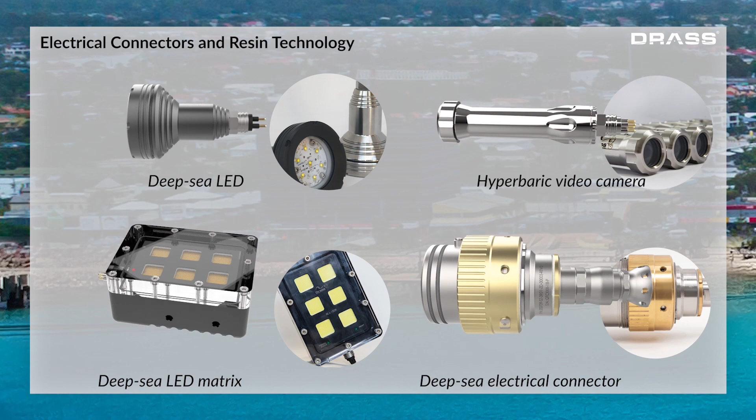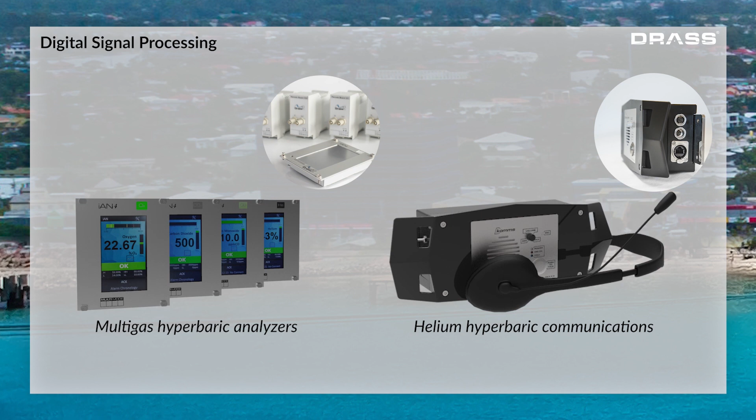We have made breakthroughs in digital signal processing. We are the only ones to have developed multi-gas hyperbaric analyzers, meaning that once connected to any gas cell, they automatically become complex analyzers of that gas. This occupies less space and reduces the need for spare parts on board.

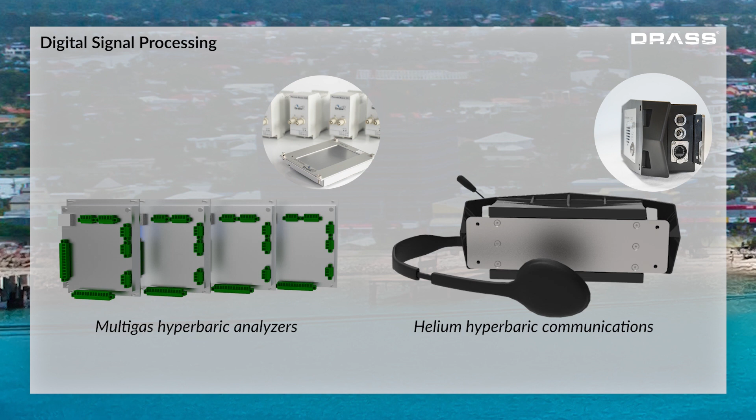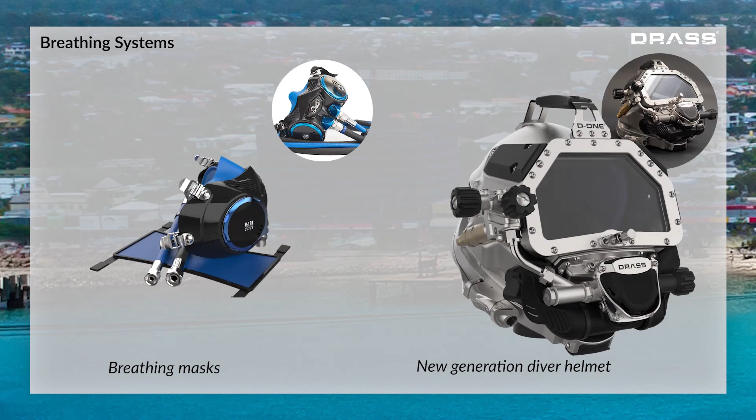Let's move on to the breathing apparatus for extreme depths. Our new diving helmet, the D-ONE, was unveiled to the oil and gas sector at Offshore Europe 2019 in Aberdeen. The D-ONE is a formidable innovation by current market standards because a single helmet supports 3 dive modes. Until now, 3 different helmets have been needed.

Producing a breathing mask or helmet is no small achievement. Heavy investment is needed in testing and simulation equipment built to specification. DRASS has the most advanced laboratory for breathing devices at depth, and all of this created without government funding.

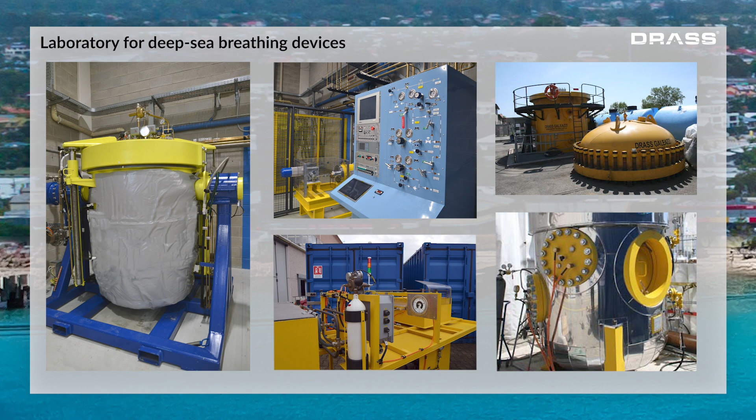Let's go back to the sea for a moment, because the development of DRASS components is aimed to support the integration of complex projects.

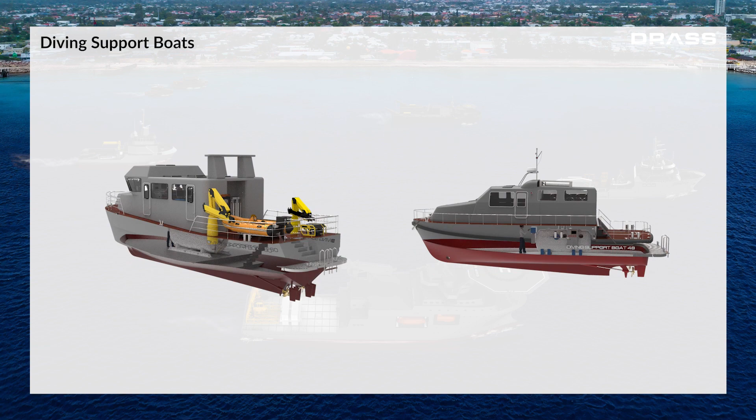We have designed diving boats with more compact dimensions and enhanced performance. This is thanks to the hyperbaric chamber installed on the keel that ensures better stability. We have also developed 2 rapid response submersible support and rescue vessels.

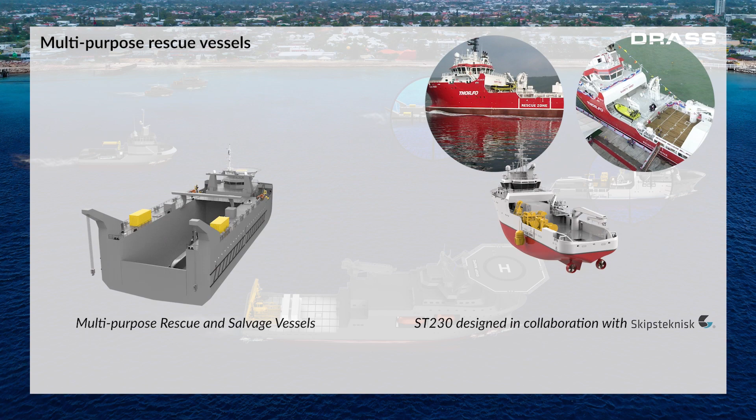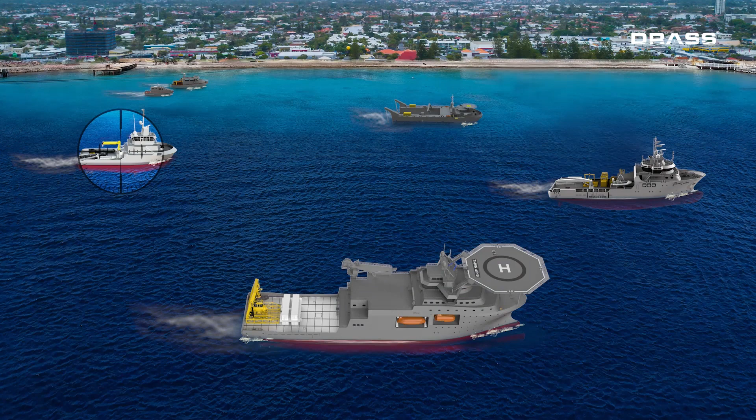But our greatest achievement to date is converting an offshore ship into the most modern submarine rescue vessel. What you see is the result of a consolidated experience in the offshore industry. DRASS has completed more diving vessels than all our global competitors combined in the last 15 years.

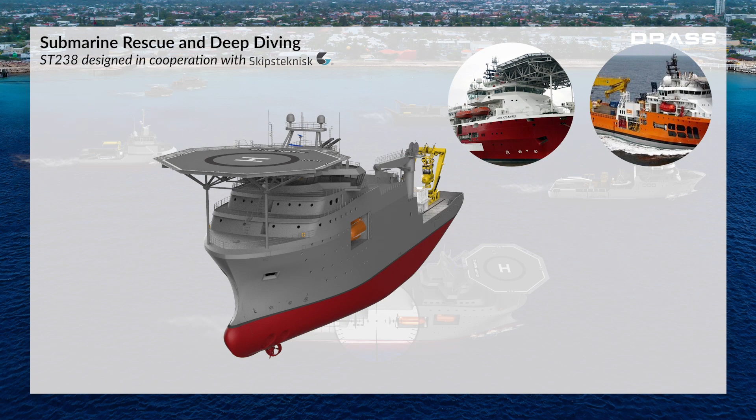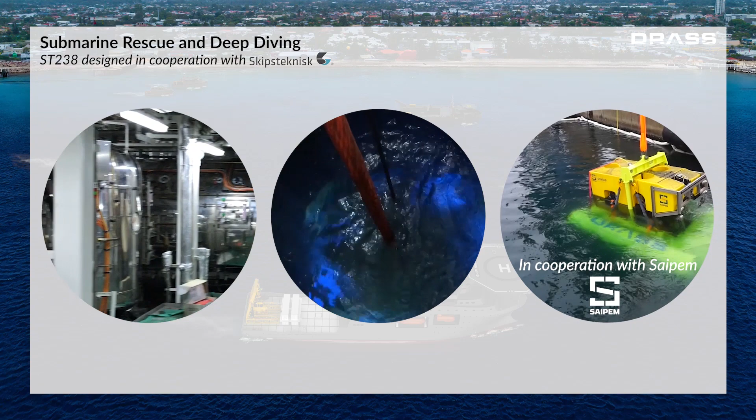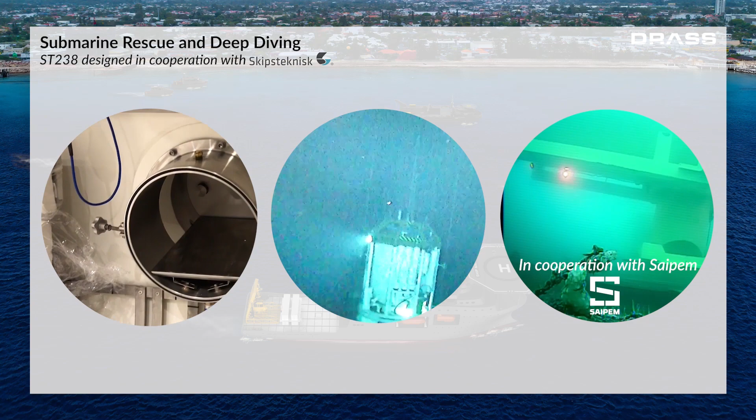This ship embeds complex and specialized systems. DRASS 100 series hyperbaric decompression chambers with automatic control represent a worldwide standard for offshore diving. The ship is equipped with a diving bell for deep dives from 300 meters deep and beyond. The remotely controlled submersible rescue vehicle, designed in cooperation with Saipem, will play a key role later in this presentation.

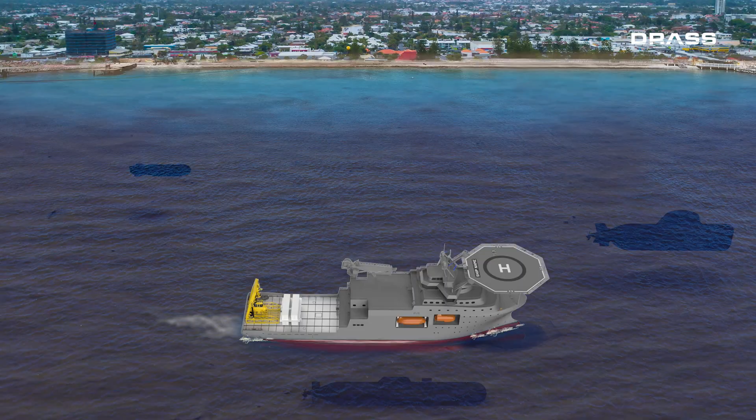Now let's get ready to dive in and explore the vehicles for the Special Forces. We will also take a closer look at the range of compact submarines, ranging from 85 to 450 tons, along with their associated weapon system by Leonardo.

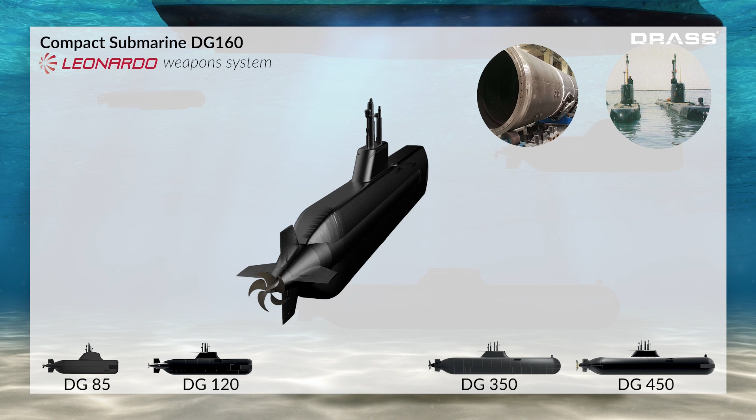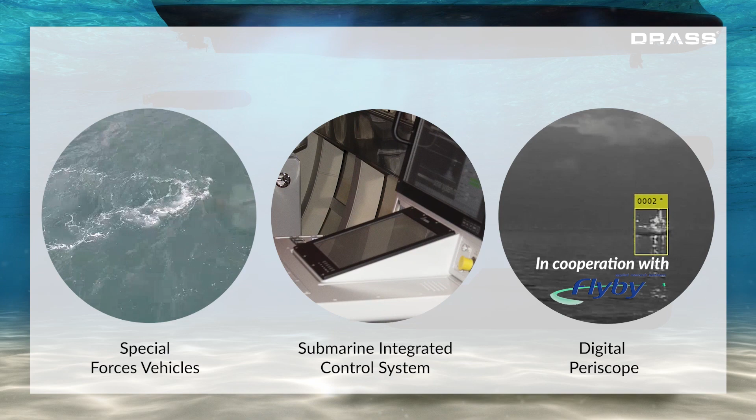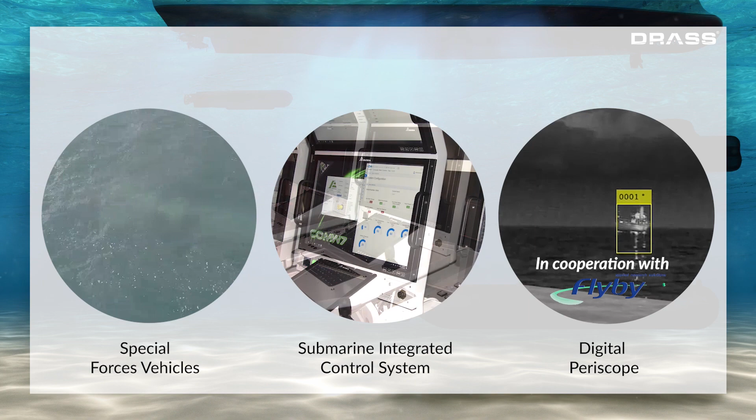Here is a world that contains a microcosm of technology. Without itemizing the vehicles for Special Forces, let's focus on the Submarine Integrated Control System. A further development is the digital periscope that synthesizes infrared and optical data in cooperation with Flyby.

Now let's focus on what happens under a submersible rescue ship, where different systems contribute to the mission. We can operate the Rapid Intervention Rescue Capsule, or release the divers with the diving bell we mentioned earlier. We can connect the ventilation system to supply fresh air to the sub.

And finally, we can deploy the remote-guided submersible rescue vehicle seen above, which represents a steep technological evolution compared to current piloted vehicles. Aside from the graphic simplifications, you can see that it's a little crowded down there, and that's going to be the guiding topic from now on.

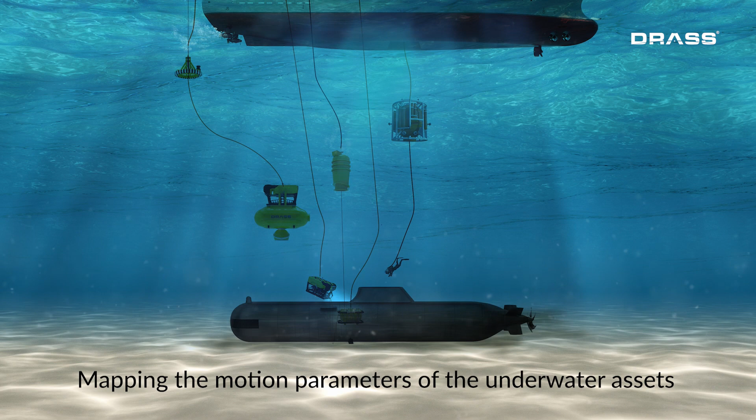In the local domain, the concept we are working on with engineering is an air traffic control solution applied to diving. The goal is to map the location and motion parameters of the underwater assets for coordinated and safe operation of multiple vehicles during a rescue mission.

Now let's broaden the view. It is a common opinion that the future will see an expansion of crafts and traffic, given the strategic value of the sea in terms of food and mineral resources and the importance of maritime routes. Of course, there is also a need to keep all of this safe.

The control of the seas in the future will be as important as the control of the sky has been until now. It will take place through a wide network of dual-use sensors, carriers and payloads, mainly resident on the seabed.

Being in control of the subsea environment means being able to manage this network and interface its components.

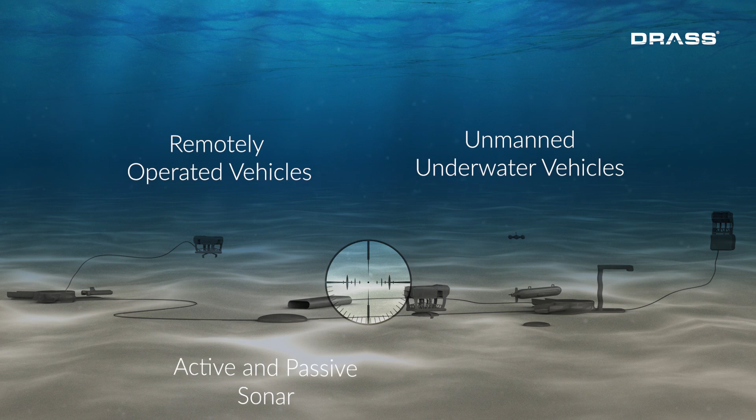As we get even closer, we see individual objects that now exist and are in the process of being developed, as you will see later in this presentation. Here you see ROVs, unmanned underwater vehicles, and sonar and subsea charging stations, technology already existing in our industry.

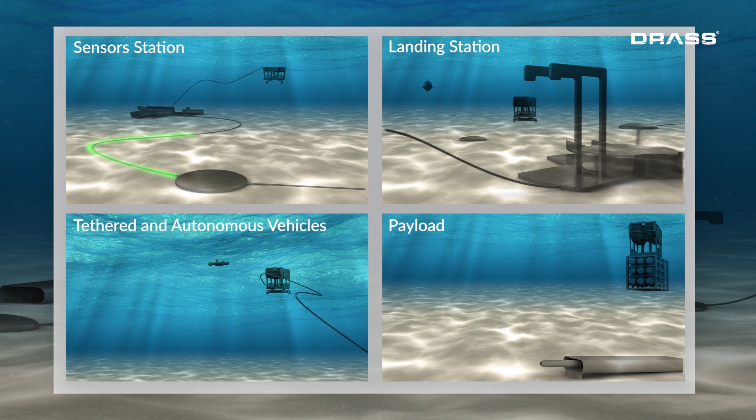Subsea, you find sensors placed on the seabed and processing information as you would find with a network of space satellites. You see charging stations for the recharging of resident vectors that carry their cargo either autonomously or wire-guided.

The payload represents the specific asset which is deployed to perform the assigned missions. Such a network will transport the highest variety of payload for defence and civilian applications. The complexity of managing the system on a global level therefore requires the identification of methods that ensure interoperability.

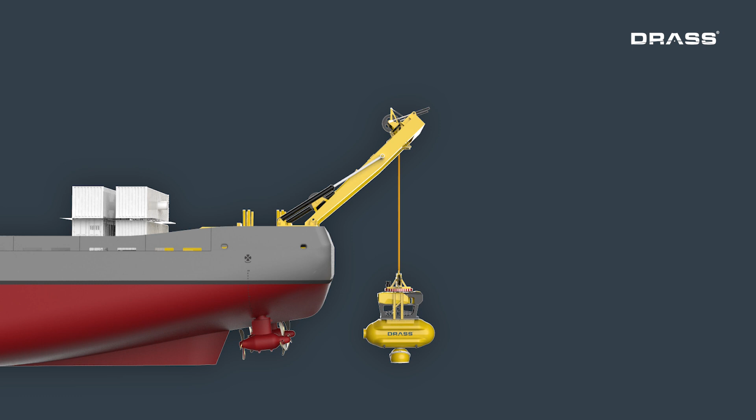The DRASS Modular Submarine Rescue System is designed with an architecture which is tailored to indicate a possible approach.

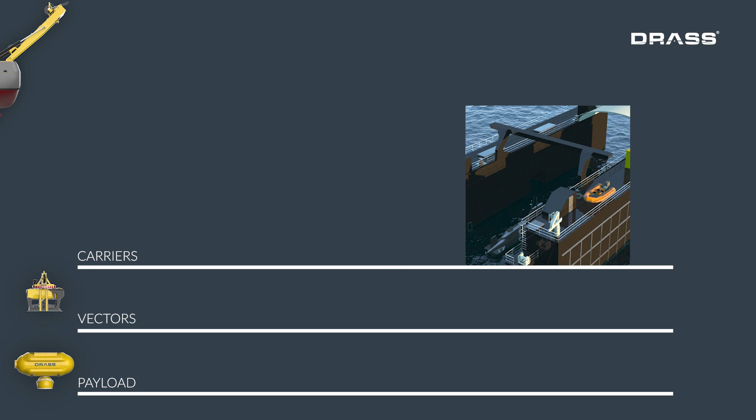A carrier is any object capable of performing transportation at surface level or above. It can be a ship, a surfacing submarine, or even an aircraft equipped with launch and recovery systems.

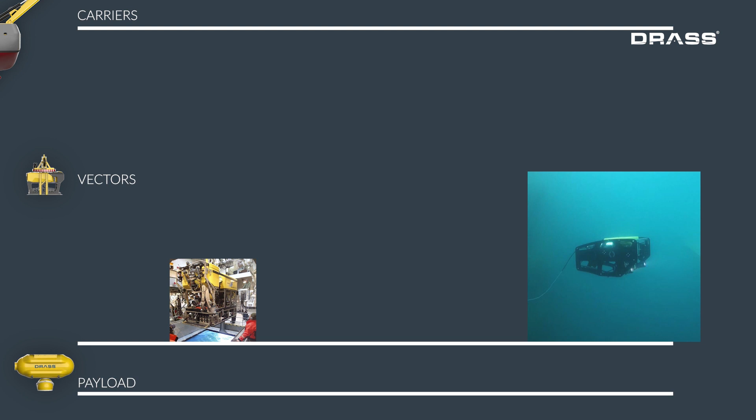A vector instead carries the payload subsea, and in general the distinction will be between autonomous and wire-guided vehicles.

The payload in this case is a submersible rescue capsule but can also be a set of autonomous vehicles or an array of passive sonars, or even a microplastic sampling system or a pollution detection device. All of these connect with the same interface to the vector.

Using as an example the interface between vector and payload, we can see that it is like a giant USB cable of the abyss, which serves to connect every device.

The interface must ensure mechanical standards to connect objects of increasing weight and dimension, cater for different electrical voltage, and support subsea communication systems depending on the distance and amount of data transmitted.

The proposed strategy is to pursue this approach in a systematic way.

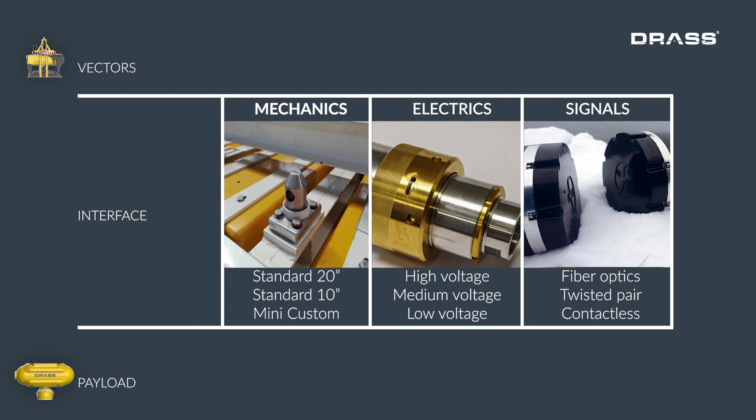If we draw a hypothetical platform of the emerging subsea technologies and knowledge, currently a bottom-up approach is followed to pursue their exploration. In fact, it could not be otherwise, because we have a fractioned industry supporting entities that manifest their requirement in a similarly dispersed way.

This is what we can expect in the initial days of a new era, a process where the various entities cited execute their respective projects, different research, contract and collaboration tools are used. However, it deals with the knowledge platform in a way that creates overlaps and unattended areas.

One of the consequences is that in the future we will not optimize interoperability. In addition, resources are not efficiently utilized and priorities are not easily identified.

Instead, imagine that we can cooperate to define a top-down approach or apply the interface we presented above as a general criterion. So we should plan ahead for the implementation of the knowledge platform.

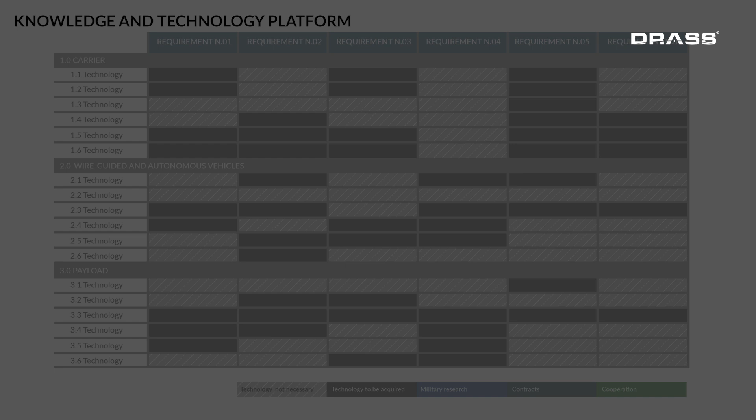This table has rows of technological elements encoded in a list. For example, launching systems, battery management systems, and communication systems.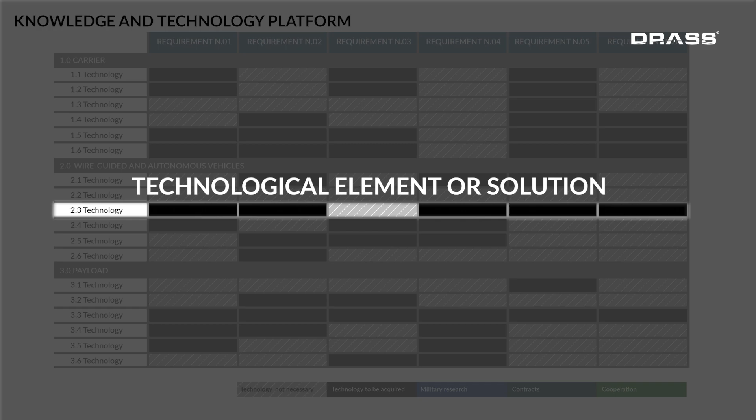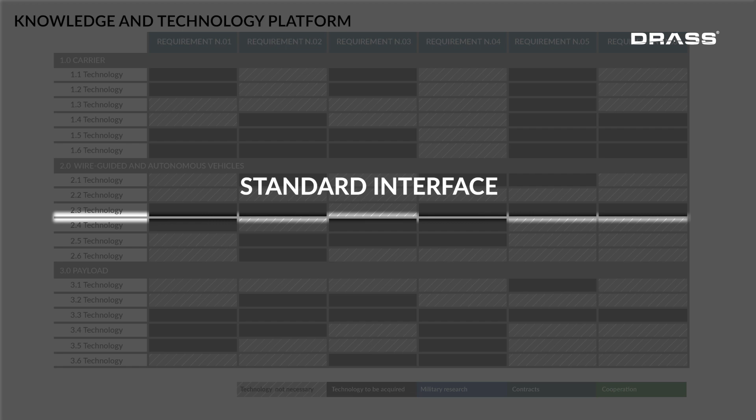These solutions are connected to each other with standard interfaces that ensure compatibility. That is, each element has a default standard interface that communicates with adjacent elements.

The columns represent specific projects, and these are defined as a selection of elements needed to complete each project. Each project requires that its black cells be completed.

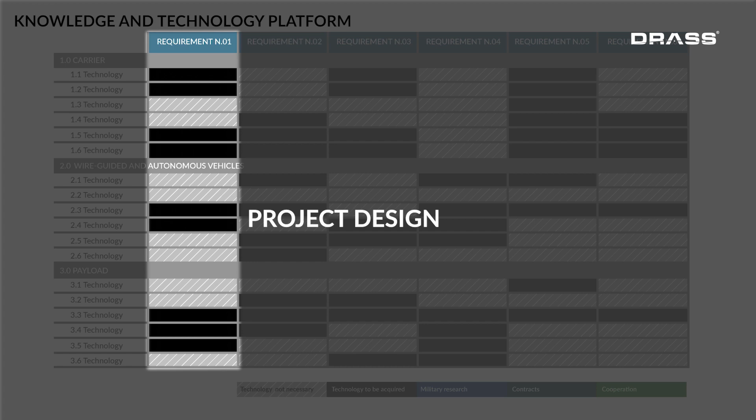When a row is entirely or partially blacked out, this means that a technological element is completed, and any completed research can serve more than one column and therefore benefit more than one project. This optimizes the effectiveness of our actions, taking into account the limited resources we have at our disposal.

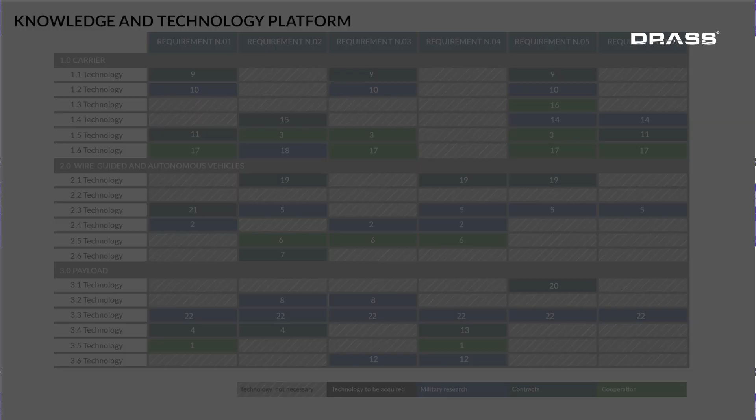This model could enable the Defence Administration or large corporations to make more effective use of small and medium enterprises, with significantly lower management and coordination expenses for both parties.

What are the prospects? AIAD is developing a database to map the technological capabilities of SMEs in the defence sector, which could be complementary to this vision. And pre-established defence programmes are funding new investments in the subsea defence sector.

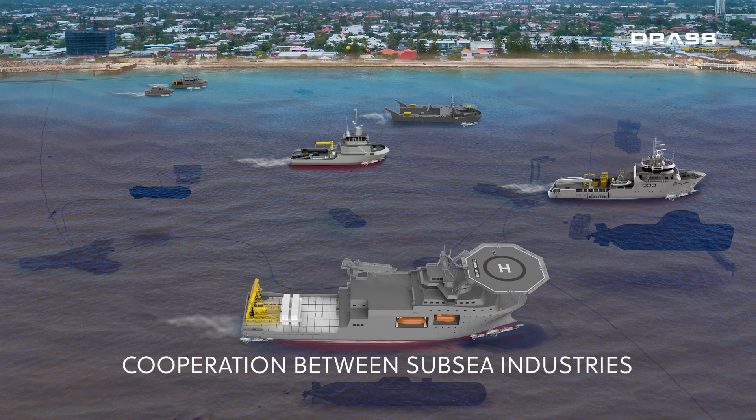But we are also convinced that an effort to consolidate cooperation is needed by one and all within the industry. But in the face of global competition, the winning element continues to be coordinated teamwork between and within the Defence Administration and the subsea industry.